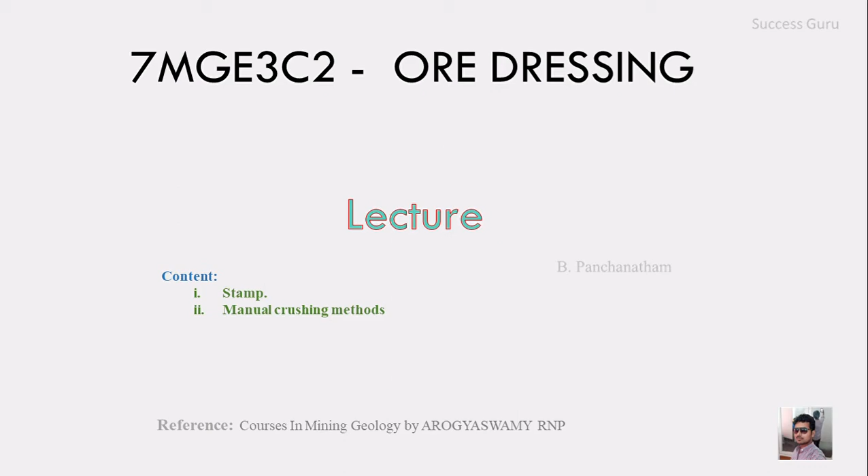We are in our regular class lecture, and the topic is ore dressing. The content which we'll try to cover is the stamping as well as the manual method of crushing. The book which I referred for this topic is A Course in Mining Geology by Arogyaswamy. So let's get into the heading.

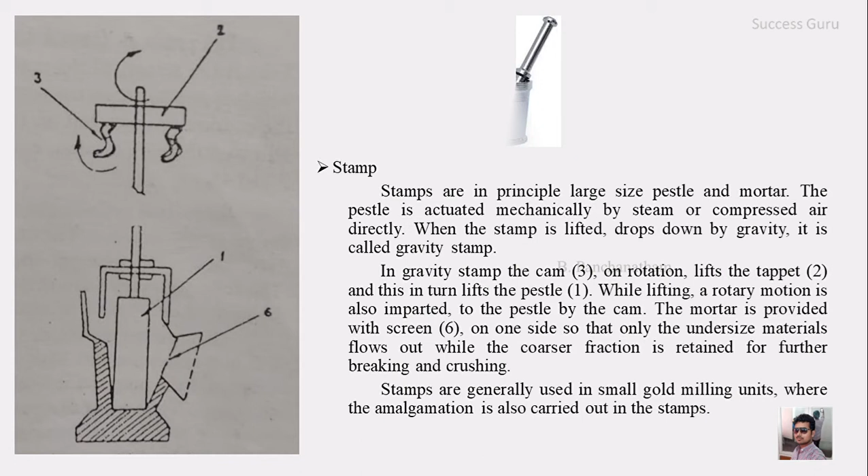The very first heading is the stamps. Actually, the stamps are in principle a large size pestle and mortar. You might have seen that there is a pestle and a mortar in which the pestle will be lifted up and breaking will be taking place in the mortar with the help of vertical movement, right? In the same way, the stamp is also working.

The pestle is mechanically actuated with the help of steam or compressed air directly, and when the stamp is lifted and all of a sudden it is dropped and the vertical movement is due to gravity, then it is called the gravity stamp. Actually, in gravity stamps there is a cam. This is the cam, number 3, in which the rotational movement will be converted into linear movement, and this way the tappet is lifted up.

Along with the tappet, the pestle is also lifted up, and a rotation movement is imparted to the pestle with the help of the cam, and the mortar is provided with the screen. So here is the screen in this mortar, where the undersized particles will be moved away through the screen. If the particle size is bigger, they will stay here for further crushing. And this is how the stamp is working.

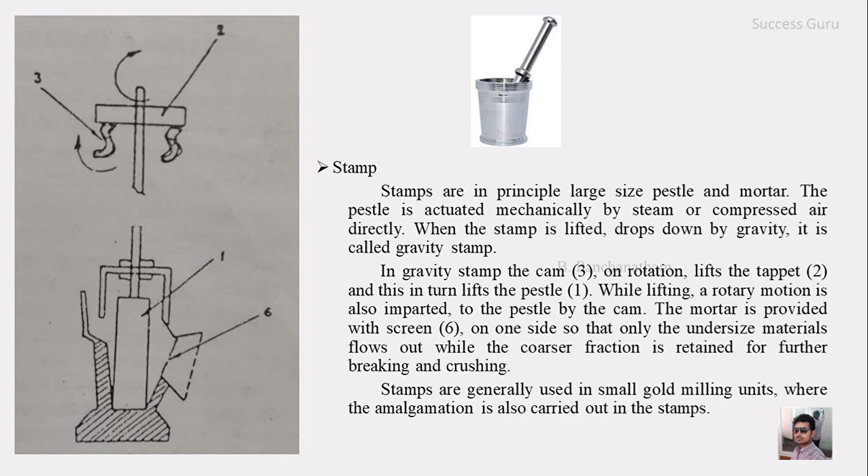The stamp is generally used in small gold milling units, where amalgamation is also carried out with the stamping action. So this is the stamp, and the next one is the manual crushing methods. Breaking and crushing is also carried out manually, and the following are a few of the methods involved in manual crushing. The first one is explosives, that is breaking of rocks with the help of explosives.

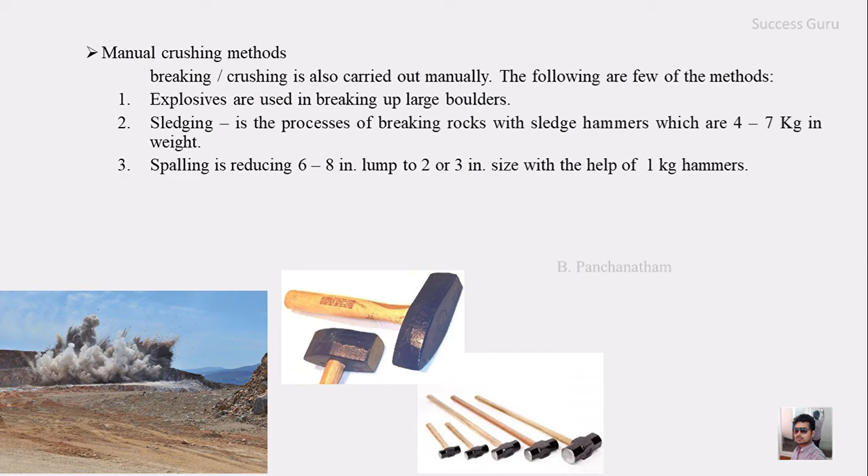The second one is sledging, the process of breaking a rock with the help of a sledgehammer, and the hammer weight ranges from 4 to 7 kilograms. The next one is spalling, which is actually size reduction. For example, a lump of 6 to 8 inch size can be reduced to 2 or 3 inch in size with the help of a hammer weighing from 1 kg. Such a reduction of size is called spalling.

The next one is the pile driving type of breaking, in which a heavy solid cylinder is lifted up and dropped suddenly. Due to the sudden dropping of such a big weight, the rock lying below will be shattered, and this shattering action is produced in this manner. By this way also the rock can be broken.

The next one is heating and quenching, which is the oldest method for breaking rocks in mining. In this method, they heat up a rock to a maximum temperature, and all of a sudden they cool the rock by dropping it in water. This is how the breaking of rock takes place. This is very efficient in liberating and breaking quartz of very high purity. So with this, the crushing heading is over.

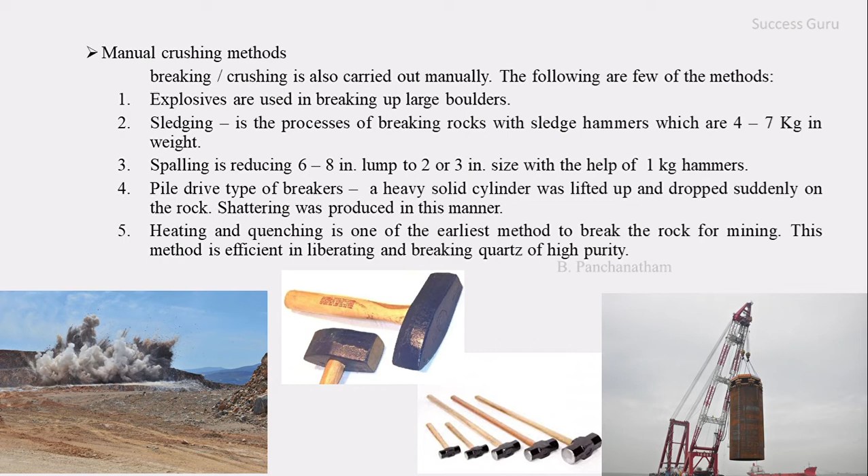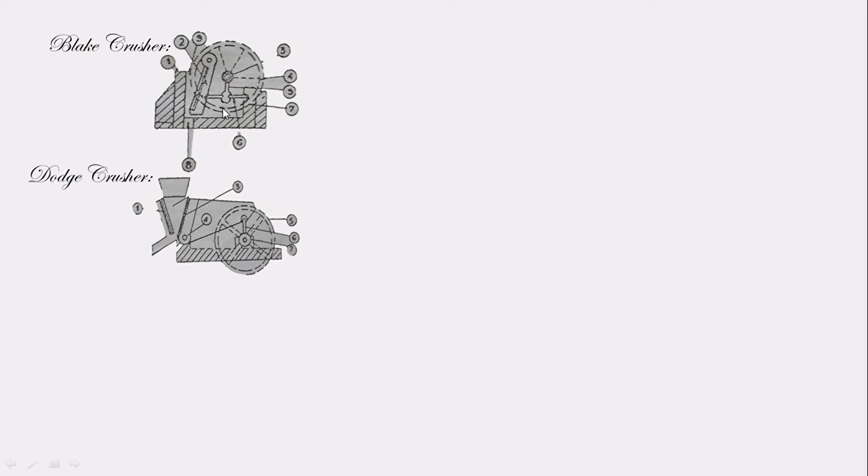The last one, which we saw earlier, is the stamp, in which the overall principle is like a pestle and mortar, and the breaking takes place due to gravity action. So with this, I think the crusher topic is over.